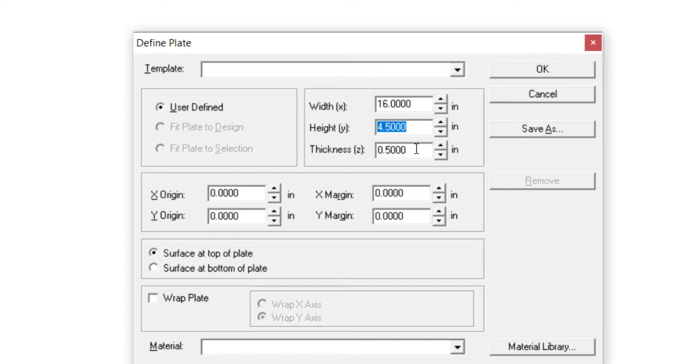We're going to set up our plate size. The document itself has to be larger than the machine exercise, so I'm going to set my document up to 16 inches to give me an extra 1.5 inches, and I'm going to make it 4.5 inches tall. So over here in Enroute, I'll type in the width. Now the width is the X direction, that's the length of our part, it's 16, height is 4.5, and the thickness of our part is going to be 1/2 inch, so I'm going to hit OK on that.

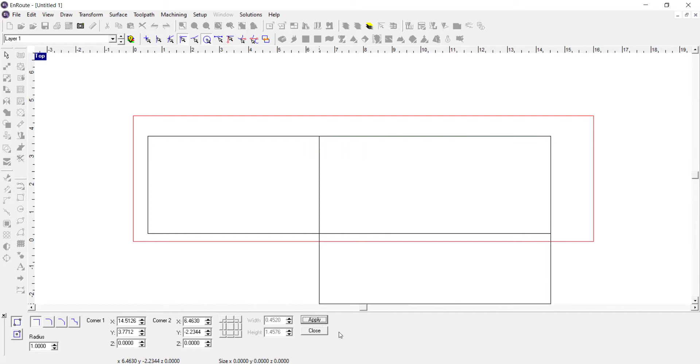Next step is to draw the rectangle that is going to be the outline of our shape, 14 3/8 by 3 inches. So I'll go to my rectangle tool and I'm just going to approximate the size of that rectangle. I'm going to sketch that out and hit apply on that. Now I got an extra one there, so when I close that I'll select this and hit the delete key. Now we're going to modify the size of this.

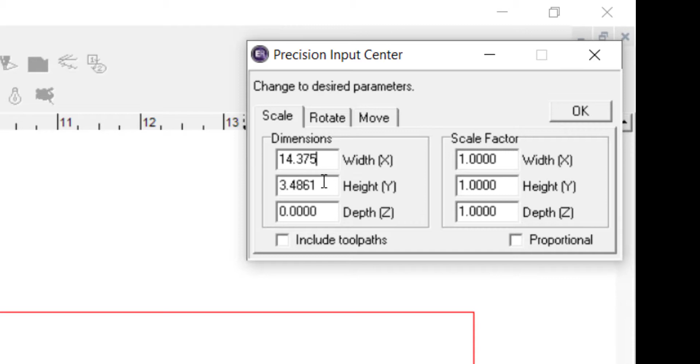You can go under View and activate Precision Input, or hit F2 on your keyboard to bring up this menu. I'm going to select my rectangle and go over to the Scale option. You may have to uncheck Proportional, and you're going to type in the exact values here. So it'll be 14.375 by a height of 3, and we'll hit OK on that. So that changes the size.

Now I want to put it in the right location. Before we move it to the center, we're going to keep it down in the bottom left hand corner. I want this corner set to the bottom left corner. I'm going to do 0 by 0 for X and Y to drop that down here, hit OK, and then click out in the white space to deselect that object.

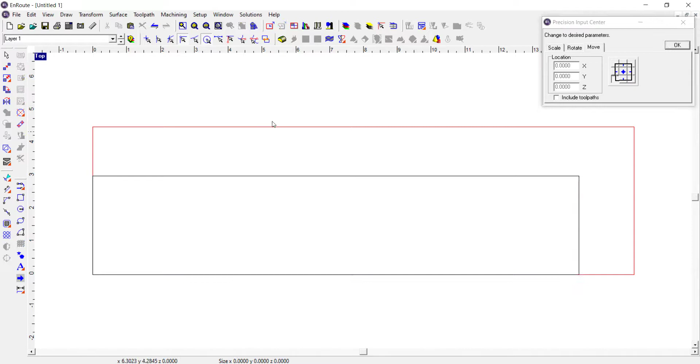Our next step will be to add in the chamfers. They're 1.5 inch chamfer on each one of those corners. So you're going to go to the fillet tool on the left over here, and type in your value.

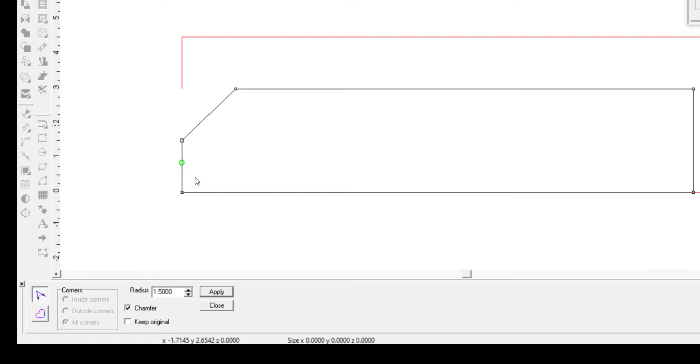I've already typed that in, but you'll highlight whatever's here and type in 1.5. You're going to select the chamfer option instead of fillet, and then click the two elements you want the chamfer between and hit apply. You'll continue to do that on all 4 corners, selecting the 2 edges, hitting apply. Select the 2 edges, hit apply. Have all 4 done, we're going to hit close.

Now this has 3 dados on it. You have 2 dados that are 1/2 inch wide, and then you have a 3/4 in the center. This dado is over 2.25 inches. The router bit is going to have to go off the part, half of its diameter, or the radius of the bit, which is 1/8 of an inch, in order to fully cut that for you.

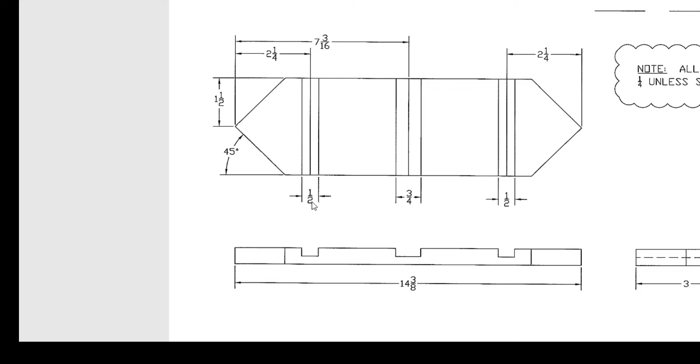So we're going to create rectangles here that are 1/2 inch wide by 3.25 inches tall. That's going to give us that little bit of overhang on each side. I'll go back to my rectangle tool, drag and click approximately where I want that rectangle, hit apply and close. Then I'm going to select the rectangle, go to scaling once again, make sure proportional is not clicked, and put in a width of 0.5 and a height of 3.25. I'll hit OK on that to size it.

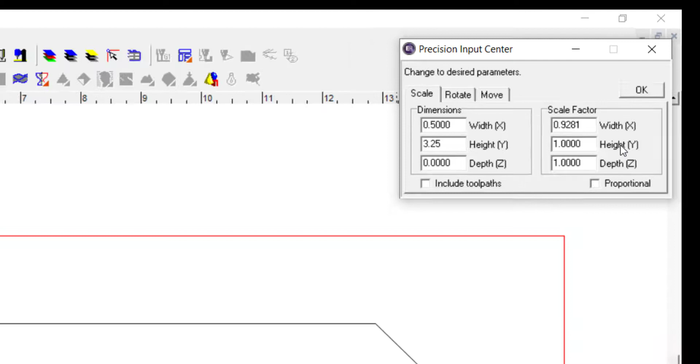Now I'm going to move it to the correct location. I'm going to grab the center point of the object. The X direction is 2.25, the Y direction is 1.5, and I'll hit OK on that.

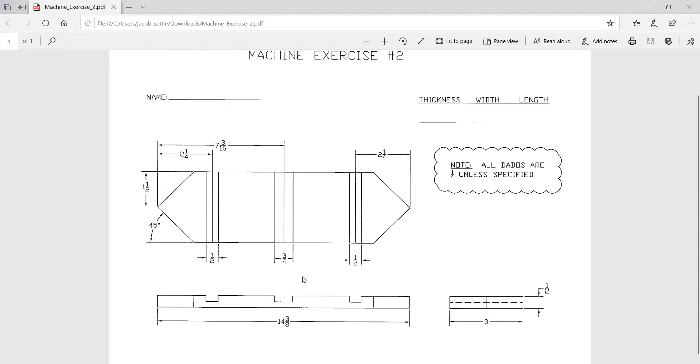Now, I could draw this rectangle again, but I'm going to copy and paste it. So Control-C and then Control-V, that gives me a second copy up on top. If I look at my drawing here, the other one is 2.25 from the other end. If we subtract that from our total length, we would get 12 1/8. So with this object selected, my Y value is correct. I'm just going to update this to 12.125 and hit OK to get my second object.

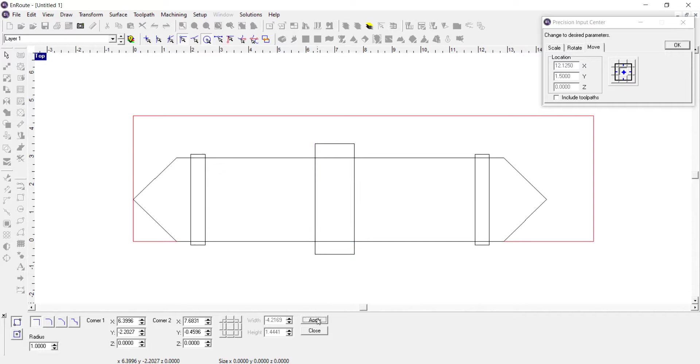Now I'm going to go back to the rectangle tool and draw in that center rectangle, kind of approximate it, hit apply and close, and then check our numbers. It should be centered at 7 3/16, and it should be 3/4 of an inch wide.

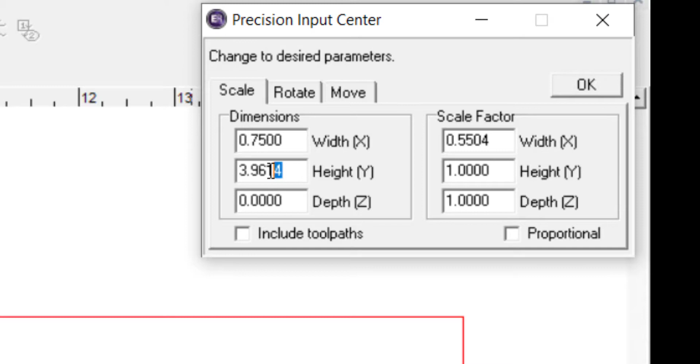It's also going to need to overhang on the top and bottom. So when I select this and go to scaling, my width is going to be 0.75. I don't have my object selected, there we go. Width 0.75, and height, same as the other ones, 3.25. We'll hit OK on that, and then I'm going to move that.

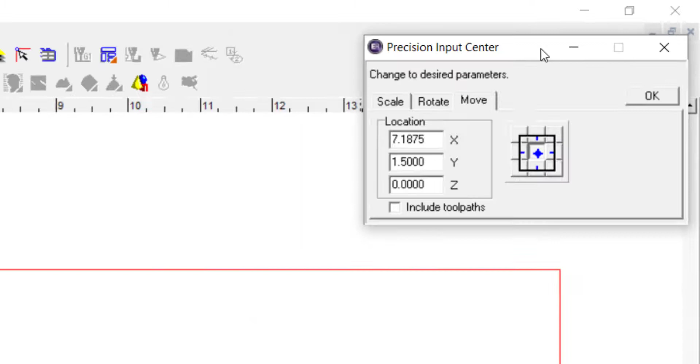Again, there's the center of the object. The Y value is the same, 1.5 inches, and the X value is going to be 7 3/16. So we'll put that back in, 7.1875, hit OK on that, and then our part is finished.

At this point, I would recommend you save this onto OneDrive. So I'm going to go ahead and save this as ME2 demo. Hit save. We're going to pick up with video 2 on how to toolpath this.